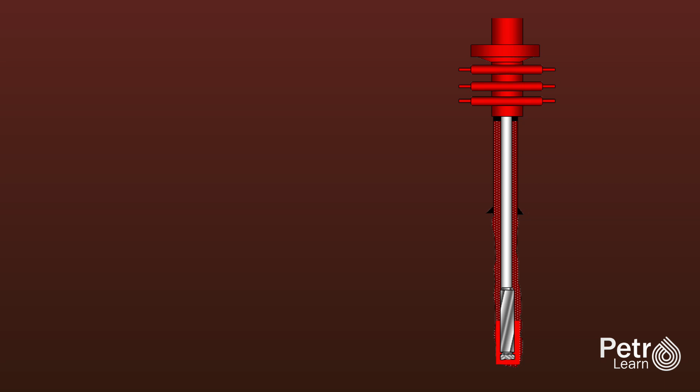To understand kick tolerance, we first need to understand what happens during a kick. A kick occurs when formation pressure exceeds the hydrostatic pressure of the drilling fluid, allowing formation fluids such as gas, oil, or water to flow into the wellbore. When this influx happens, the well is shut in and the kick is circulated out using controlled procedures.

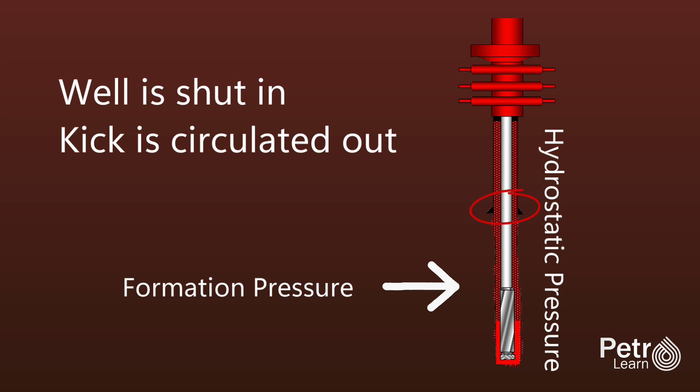However, as the kick is circulated to surface, the annular pressure increases, and this additional pressure is applied to the formation, especially at the casing shoe or weakest exposed formation. If this pressure exceeds the fracture pressure, losses can occur, potentially leading to a drop in the hydrostatic level and eventually an uncontrolled blowout. This is where kick tolerance becomes crucial.

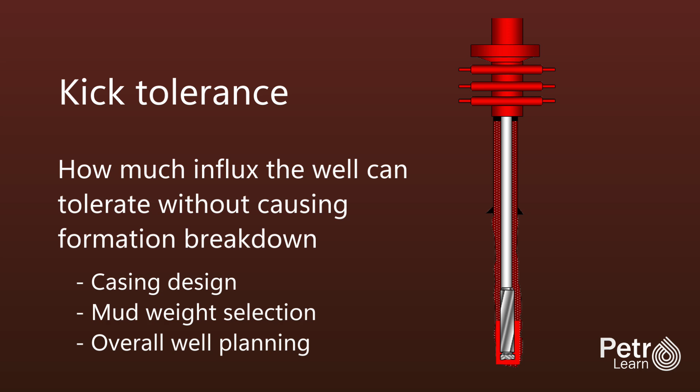Kick tolerance defines how much influx the well can tolerate without causing formation breakdown during circulation of the influx out of the well. If kick tolerance is low, even a small influx can be dangerous. If it is high, the well has a greater margin of safety. Therefore, kick tolerance is not just a theoretical concept, it directly influences casing design, mud weight selection, and overall well planning.

Kick tolerance is primarily controlled by four key factors: formation fracture gradient, pore pressure, casing shoe depth, and mud weight. The fracture gradient determines how much pressure the formation can withstand before breaking. The pore pressure represents the pressure of fluids within the formation. The casing shoe depth defines the weakest exposed point in the well, and the mud weight determines the baseline hydrostatic pressure in the wellbore. Any change in one of these factors will directly affect kick tolerance.

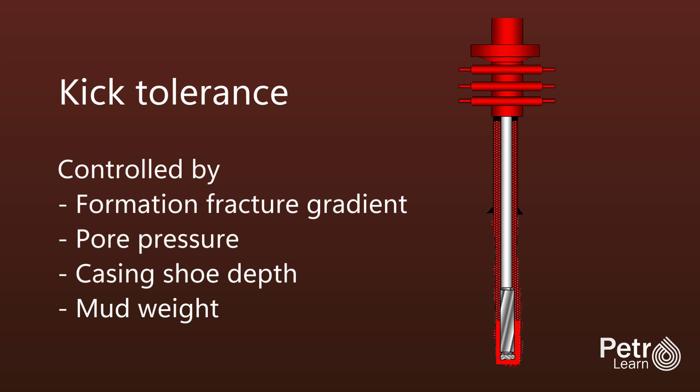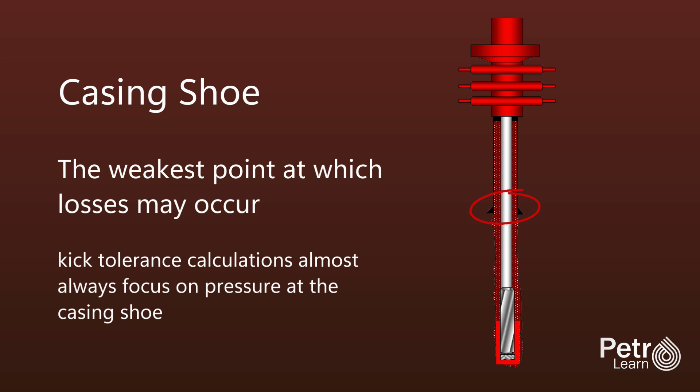One of the most important locations when evaluating kick tolerance is the casing shoe. The casing shoe is usually the weakest point because below it the formation is exposed and unprotected by casing. As we go deeper, formations tend to be more compacted due to higher overburden pressure, hence tend to be stronger. During kick circulation, if the pressure at the shoe exceeds the fracture pressure, losses occur, reducing hydrostatic pressure and potentially leading to an uncontrolled situation. That is why kick tolerance calculations almost always focus on pressure at the casing shoe.

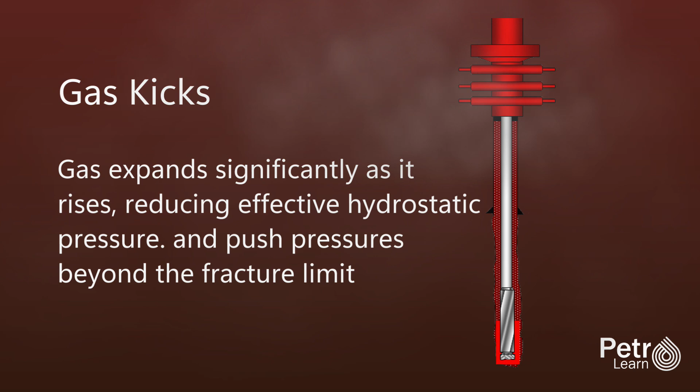Gas kicks are especially dangerous when it comes to kick tolerance. Gas expands significantly as it rises, which increases annular pressure due to reducing effective hydrostatic pressure. This expansion can rapidly push pressures beyond the fracture limit, even if the initial influx volume was small. For this reason, kick tolerance is usually calculated assuming a gas kick, making it a conservative and safer design approach.

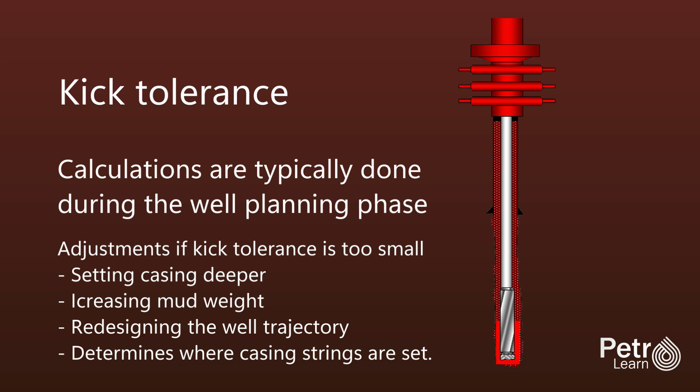Kick tolerance calculations are typically done during the well planning phase. Engineers calculate the maximum allowable kick volume that can be safely circulated out without exceeding fracture pressure at the casing shoe. If the calculated kick tolerance is too small, adjustments must be made. These adjustments may include setting casing deeper, increasing mud weight, or redesigning the well trajectory. In many cases, kick tolerance directly determines where casing strings are set.

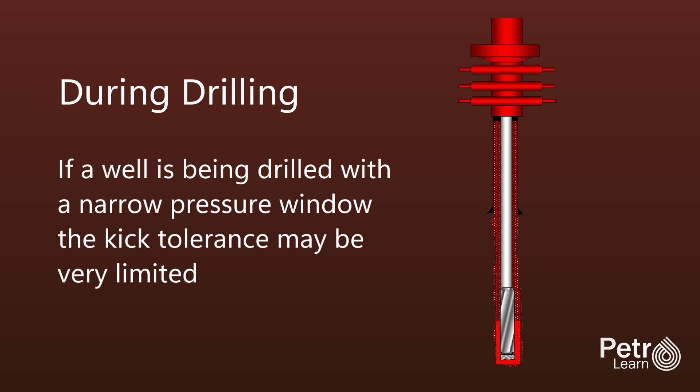During drilling operations, kick tolerance also plays a role in decision-making. For example, if a well is being drilled with a narrow pressure window, the kick tolerance may be very limited. This means the crew must be extremely vigilant in detecting early signs of kicks, such as pit volume gain, flow rate increase, or changes in pump pressure. Early detection reduces the influx volume and keeps the kick within tolerable limits.

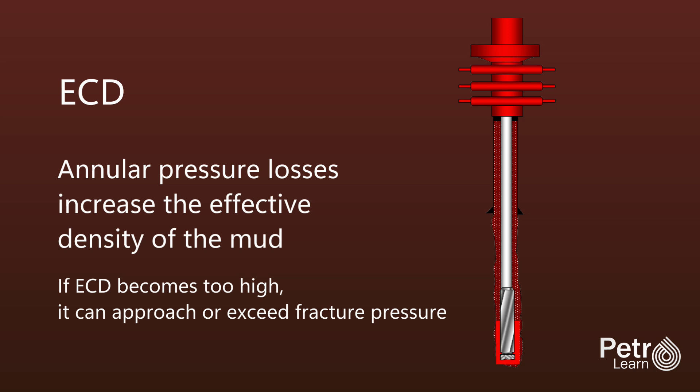Another important aspect of kick tolerance is its relationship with equivalent circulating density, or ECD. When circulating drilling fluid, annular pressure losses increase the effective density of the mud. If ECD becomes too high, it can approach or exceed fracture pressure even without a kick. When a kick is present, the combined effect of ECD and shut-in pressures can significantly reduce kick tolerance. This is especially critical in deep water, extended reach, and HPHT wells.

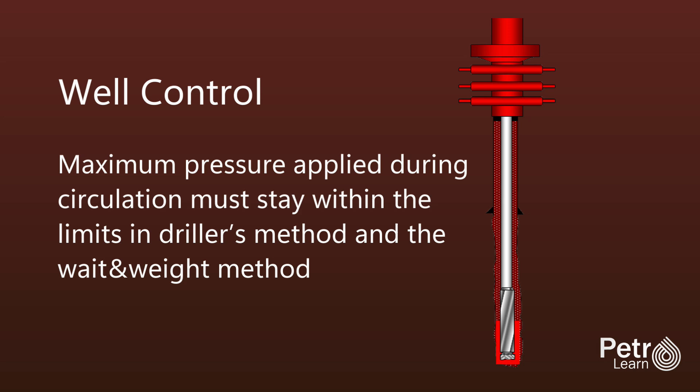Kick tolerance is also closely linked to well control procedures. Methods such as the driller's method and the wait-and-weight method both aim to circulate the kick out while maintaining bottom hole pressure constant. However, regardless of the method used, the maximum pressure applied during circulation must stay within the limits defined by kick tolerance. Exceeding these limits can lead to lost circulation, underground blowouts, or complete loss of well control.

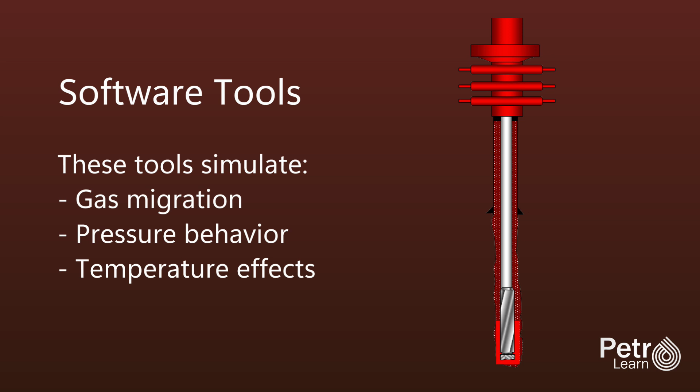In modern drilling operations, software tools are often used to model kick tolerance more accurately. These tools simulate gas migration, pressure behavior, and temperature effects to provide a more realistic picture of well response during a kick. However, even with advanced software, the basic principles remain the same: keep pressures below fracture limits and maintain sufficient hydrostatic control.

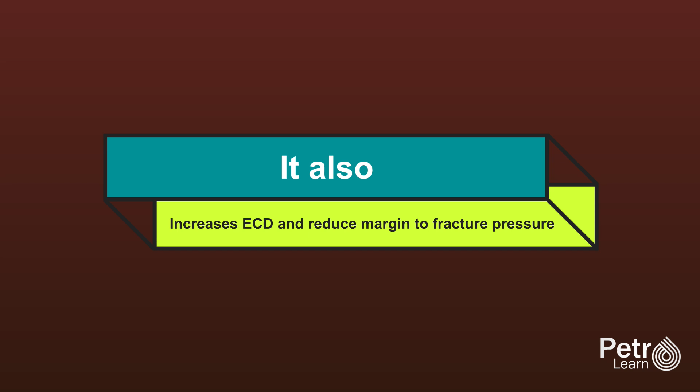A common misconception is that increasing mud weight always improves kick tolerance. While higher mud weight increases hydrostatic pressure and reduces the likelihood of a kick, it also increases ECD and may reduce the margin to fracture pressure. In some cases, increasing mud weight can actually reduce kick tolerance rather than improve it. This is why kick tolerance must always be evaluated as part of a balanced pressure management strategy.

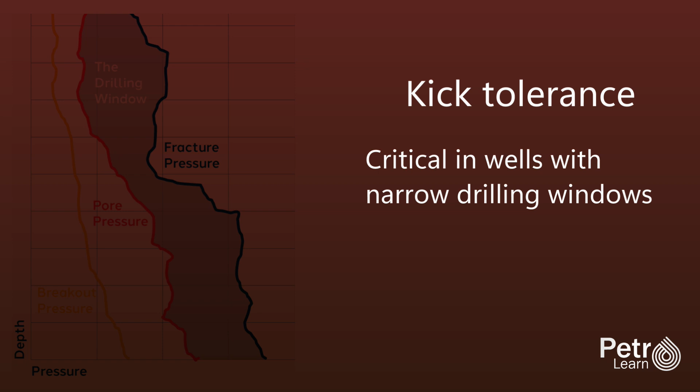Kick tolerance is especially critical in wells with narrow drilling windows, such as HPHT wells, depleted reservoirs, and deep water environments. In these cases, the difference between pore pressure and fracture pressure may be very small, leaving little room for error. Even a small influx can exceed tolerable limits, making accurate calculations, real-time monitoring, and disciplined operational practices essential.

In conclusion, kick tolerance is a fundamental concept that lies at the heart of safe drilling operations. It defines how much formation influx a well can safely handle and directly influences casing design, mud programs, and well control strategies. Ignoring or underestimating kick tolerance can lead to catastrophic consequences, while proper understanding and application significantly reduce the risk of well control incidents. For drilling engineers, supervisors, and rig crews, mastering kick tolerance is not optional, it is a critical requirement for drilling safe and successful wells.